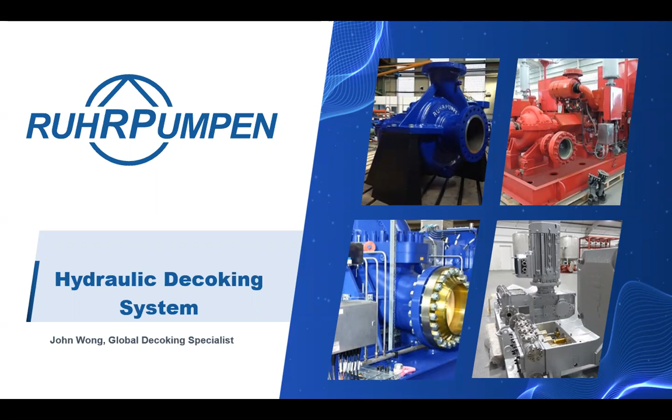My name is John Wong and I am the Global Decoking Specialist here at Ruhrpumpen. My role is to support OEM installations as well as revamp jobs around the world. Today, I'd like to give you a brief overview of our company and its products to help you succeed in your decoking operations. After a quick introduction about Ruhrpumpen, I'll touch on the various components of our decoking system, which sets us apart in the marketplace.

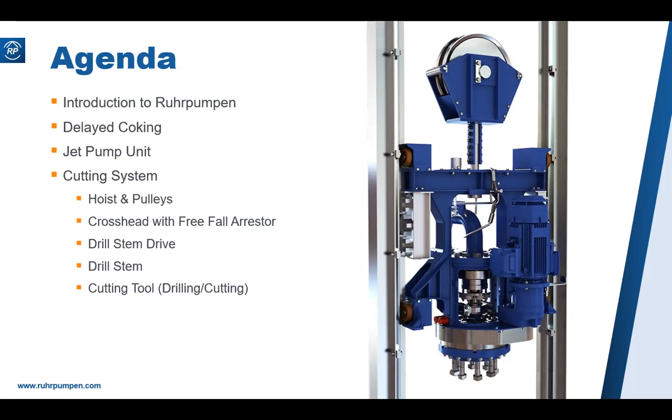Ruhrpumpen began in 1950 in Witten, Germany, with the sole purpose of maintaining existing pumps of all makes and models. There were a series of mergers and acquisitions in the mid-50s, 60s, and 70s, and eventually in 1996, the Thyssen board decided to go a different direction and sold off its pump business.

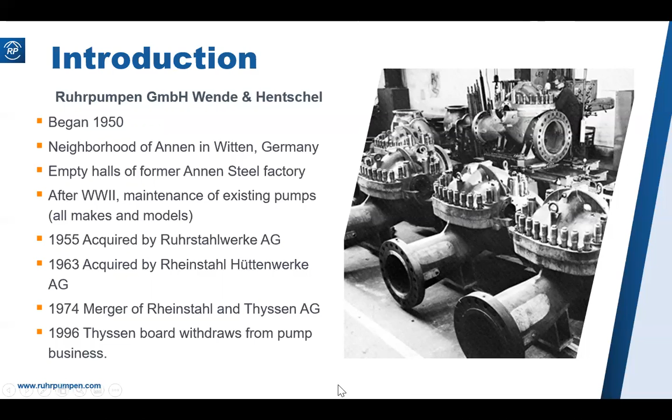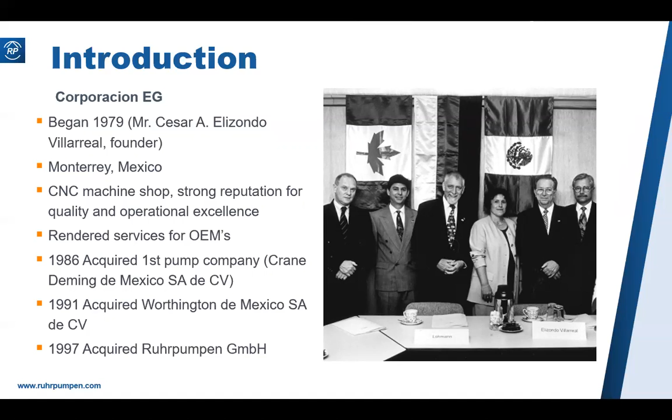In the meantime, Corporación EG was founded in Monterrey, Mexico in the late 70s as a CNC machine shop with a strong reputation for quality and operational excellence. It too acquired various companies, especially pump companies in the 80s and the 90s. Finally, in 1997, it acquired Ruhrpumpen since it was a perfect match with its business philosophy.

This chart is showing the trend over time of the size of the decoking drums. The top line, or the red line, shows that the flange to flange length of the drum steadily rises over time, while the blue line at the bottom is showing that the drum diameter is also increasing as well. So that means more volume of coke needs to be cut.

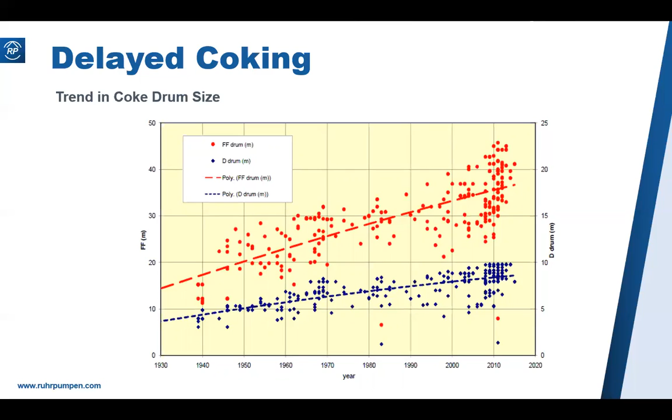Over the years, the coke is also heavier. Ruhrpumpen has always designed a 6,000 PSI system from the start so that it would cover the realm of all decoking parameters. So we've already designed for this trend.

The heart of the decoking system is the jet pump, which is also the largest pump in a refinery. It is a BB5 design according to API 610 with a cartridge designed for easy changeouts. And easy changeouts are important because that means the pump is usually unspared and continued operation is critical.

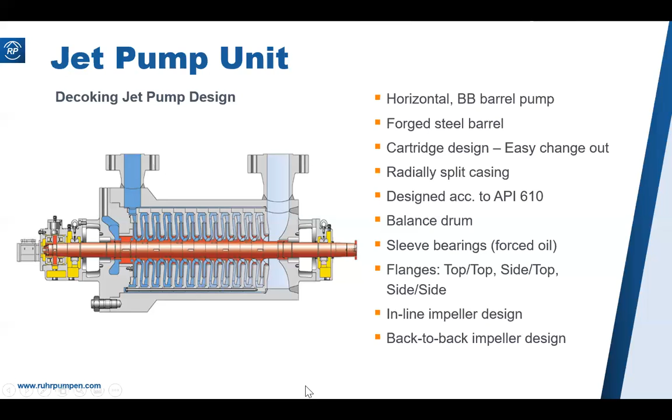Depending on the cutting conditions, Ruhrpumpen may recommend an inline impeller design or a back-to-back design. And the advantage of a back-to-back arrangement is lower axial thrust loads, resulting in a longer thrust-bearing life. Jet pumps are centerline mounted to better accommodate for thermal expansion in the process. And as you can see, the flow rates, heads, and speed can be quite high to meet decoking requirements.

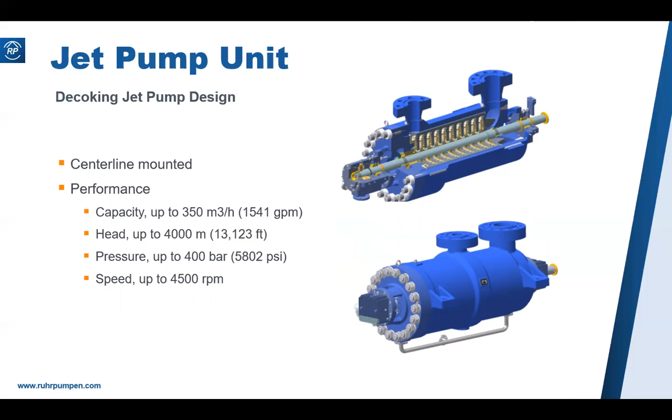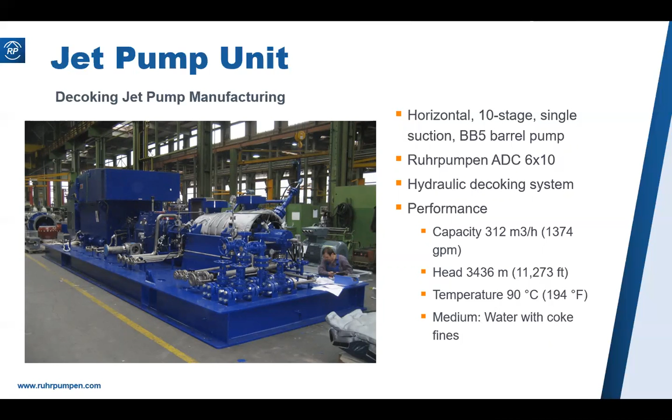Ruhrpumpen is set up to conduct functional testing on the complete unit. This may also include the jet decoking control valve as well as the jet cutting tool.

To properly conduct a complete unit test, it's important that the pump skid is on a massive permanent foundation rather than raised up on temporary supports.

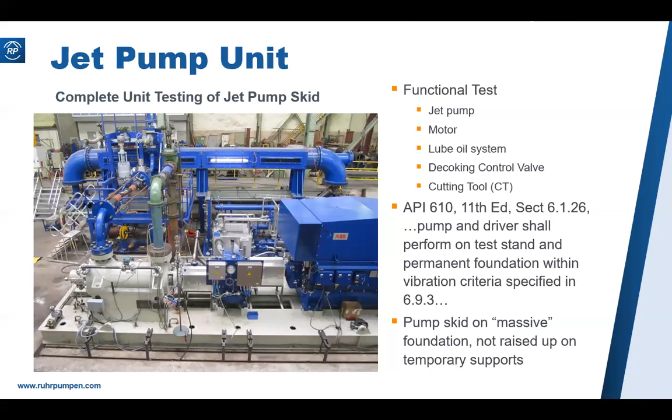One of the requirements for API 610 is that you have to measure the vibration during the testing. And the reason for raising the pump up is to allow for the oil to drain back to the lube system reservoir by gravity. So for vibration purposes, we really don't want to raise them up on temporary supports, but rather have the pump skid on a foundation.

Ruhrpumpen's test facilities allow for the lube oil skid to be installed in a sunken area of the test facility to allow for gravity flow of the oil back to its reservoir. That way, the pump skid can rest on its massive foundation and not be subject to vibrations induced by being placed on temporary stilt supports.

Through the port windows in the blue section that you can see, the long blue section, you can observe the water stream. And the length of this blue section simulates up to a 30-foot diameter drum. You're always welcome to visit RP's facilities to observe this type of testing.

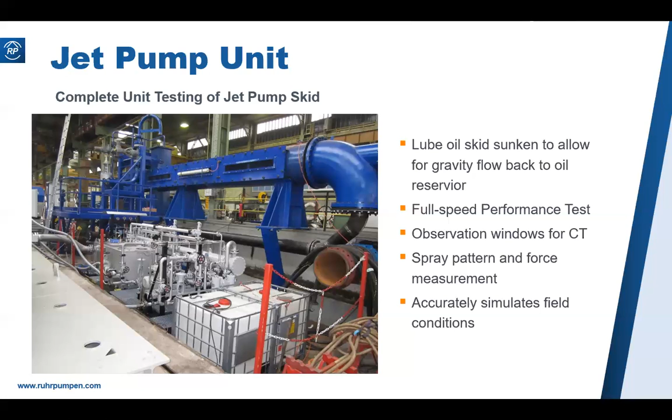Here you can see a jet pump skid installed in the field with the pump control panel.

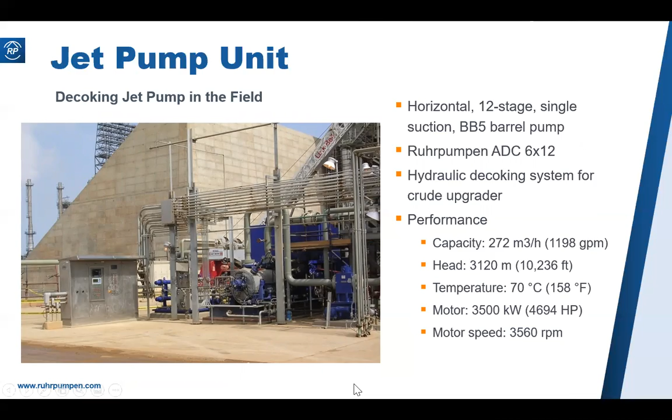And now I want to go into the cutting system. In this configuration of the cutting system, the wire rope starts at the hoist, goes through a single pulley to the crown block double pulley up here, and onto the traveling block double pulley located here, and terminates back at the crown block. Now the crown block has a load cell, which measures the wire rope tension.

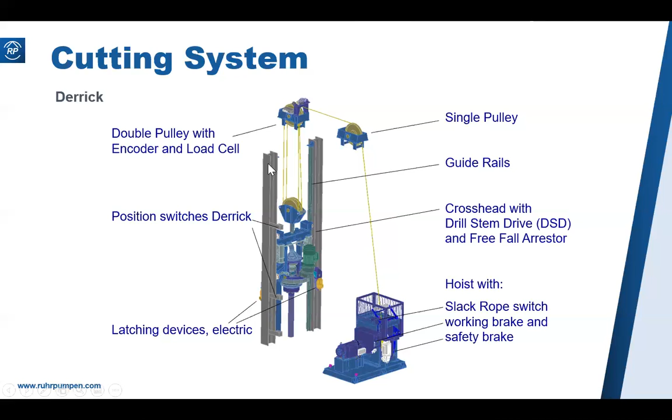An absolute encoder is also used to accurately measure the travel distance of the cutting system. Depending on the licensor, the wire rope can also terminate at the cutting deck location, as I show in the next slide. Here, this licensor typically prefers termination of the wire rope at the deck, and here is where the load cell would be located, near the hoist.

Like I said, some licensors prefer to have the wire rope terminate at the crown block.

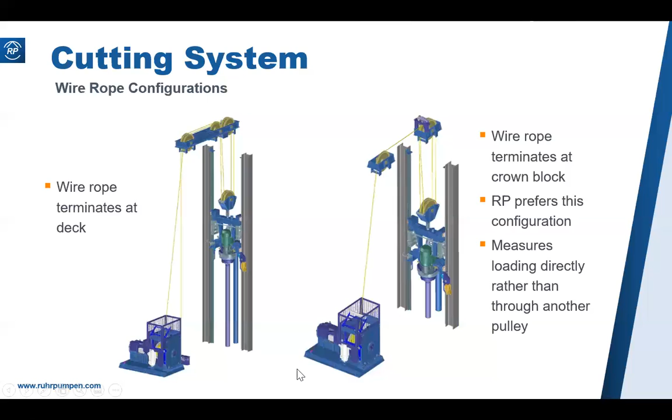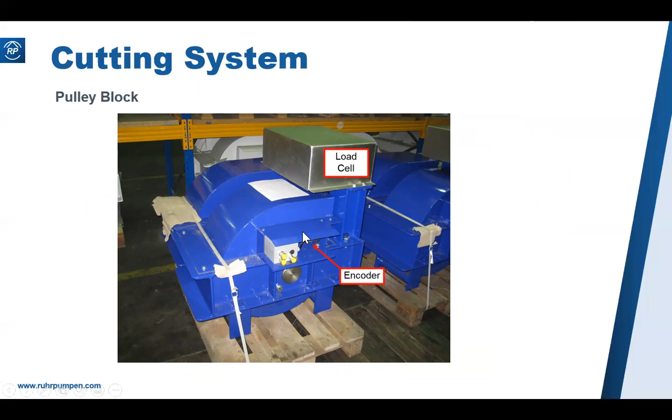This is a close-up view of the RP's crown block pulley with the load cell and the encoder. You can see that Ruhrpumpen utilizes the robust 24-inch diameter sheaves in its pulley blocks.

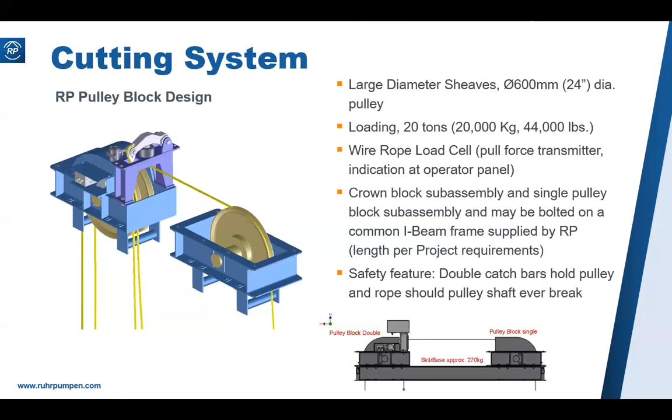One of the key safety features of the Ruhrpumpen pulley blocks is the double catch bars. They are indicated at the bottom of each blue colored pulley, right here and over here. The purpose of these are to catch and safely hold the pulley and rope in the unlikely event that the pulley shaft ever breaks.

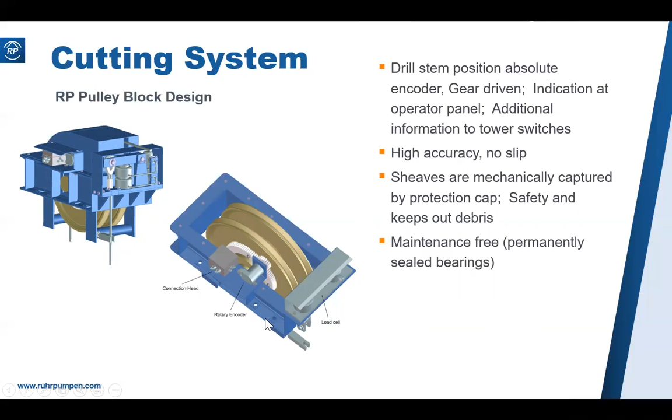Here's another close-up picture with the cover removed. You can see that the pulley is gear-driven and drives this absolute encoder here, and this allows for high accuracy measurement with no slip. We use permanently sealed bearings, which will enable a maintenance-free operation.

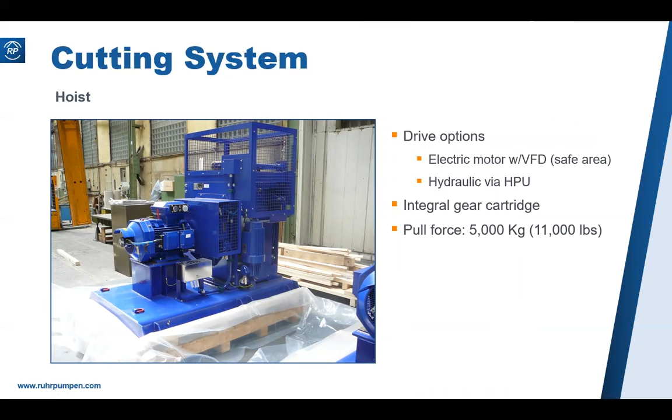Moving on to the hoist. The hoist has two different drive options, electric motor with VFD, as well as hydraulic driven. Inside, it's an integral gear cartridge, and the pull force is up to 11,000 pounds.

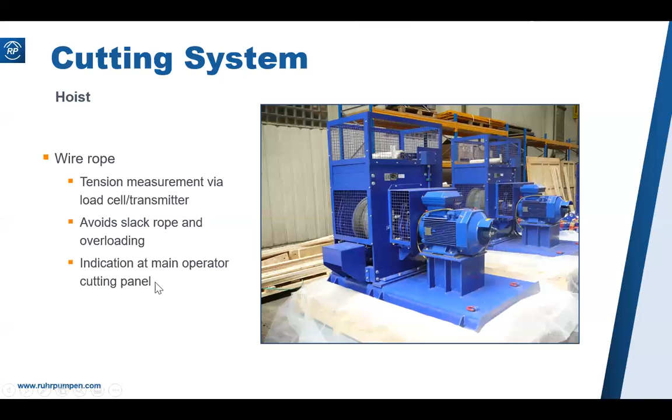Once again, the tension is measured via a load cell at the crown block, where slack rope and this tension are indicated at the main operator cutting panel.

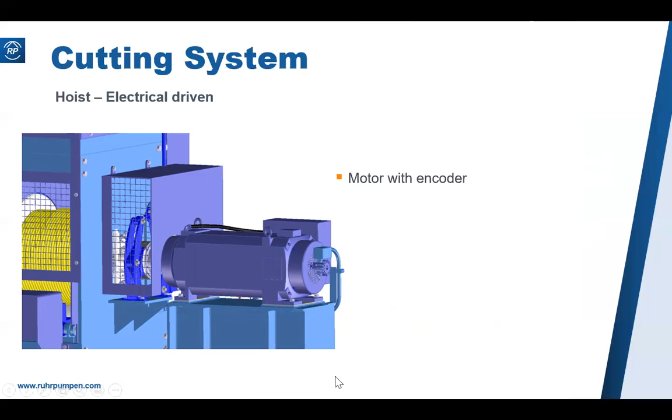Here's a close-up picture of the motor with encoder. Not only is there an encoder at the hoist motor, but there's also one at the crown block. When we remove the cover, you can see the working brake, which is actuated by an electric solenoid, as well as the backup safety drum brake. So in all, there are 3 brakes, a redundant system: the working brake, the safety drum brake, as well as the electric motor brake.

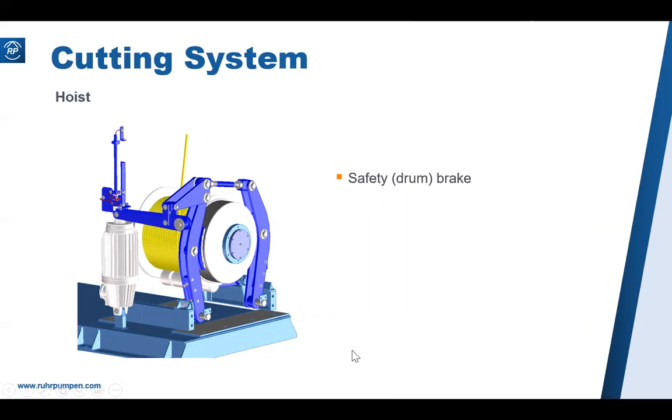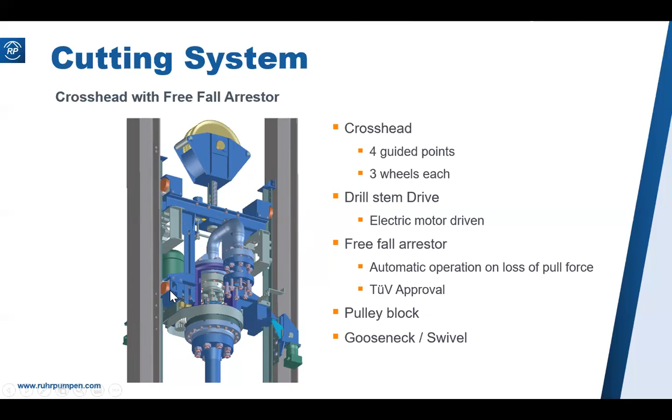The drill stem drive is electric motor driven, and the freefall arrestor is built into the guided points here. You can see up close what the roller guides look like. It's a 3-wheel system for very smooth operation.

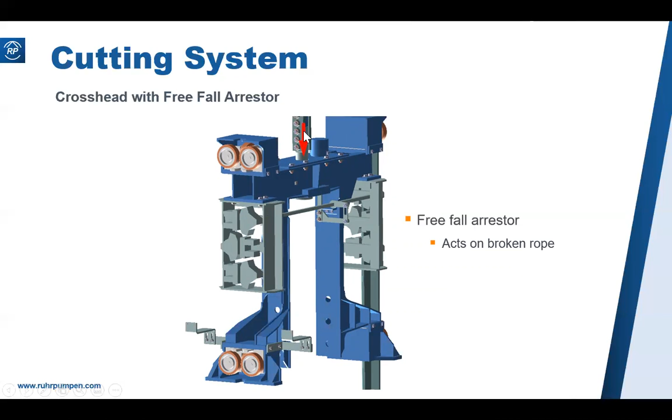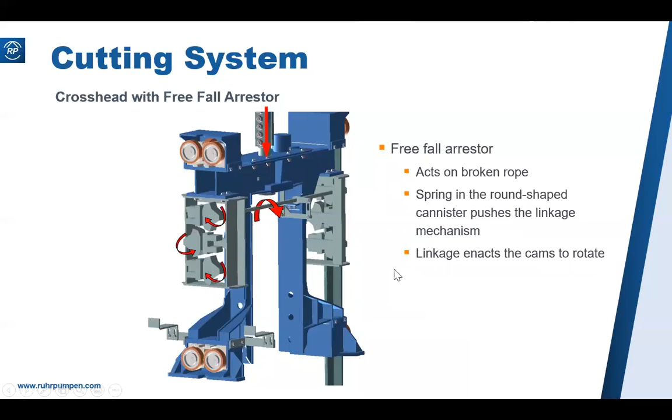Now, the freefall arrestor system works in such a manner: it acts on a broken rope. So if you lose the holding force of the wire, it breaks, for example. You then have a spring, located in this round-shaped canister, pushing the linkage mechanism, and this linkage enacts the cams to rotate. When the cams rotate, it presses onto the T-rail. So the faster the fall, the greater the grip will be on the T-rail.

Tungsten carbide bits, located in the bottom of each cam I've shown here, are able to grab securely onto the rail.

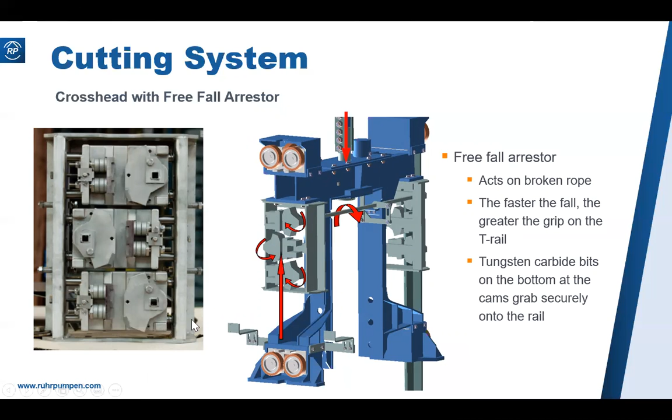We can do field testing during commissioning, as well as recertifying the freefall system every turnaround or every several years, whatever the customer prefers. It has a weight capacity of 9,500 kilograms, which is 20,000 pounds. And as I mentioned, there is functional testing available at your sites.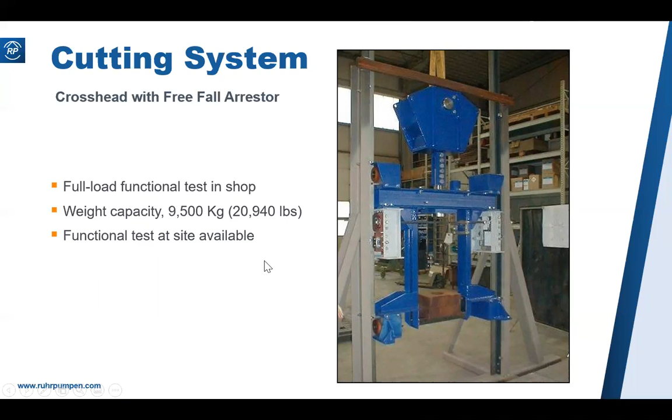The drill stem drive has primarily a VFD-driven electric motor. It has a high capacity load bearing, as indicated here, the slewing ring type. It's grease lubrication with auto greasers, which means very, very low maintenance, and there is no oil in the system, so there's no oil bath change. We also have cartridge packing for the seals.

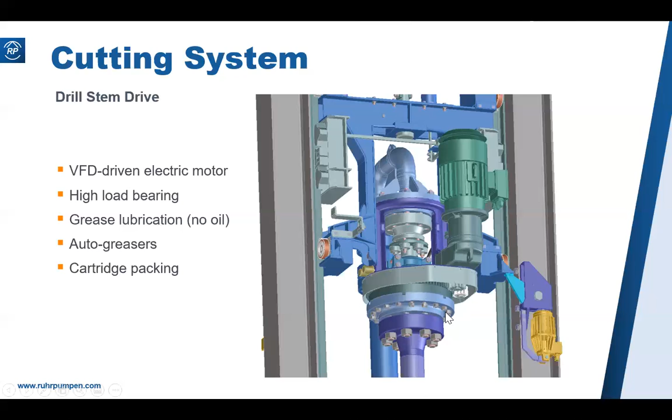Taking a look at the exploded view here, we could see the center bull gear design, and it's very similar to what is used on a crane. In fact, that is where the idea came from. Ruhrpumpen has revolutionized their decoke cutting equipment with innovation and safety by bringing in proven technologies from other industries and adapting them to the coke cutting equipment.

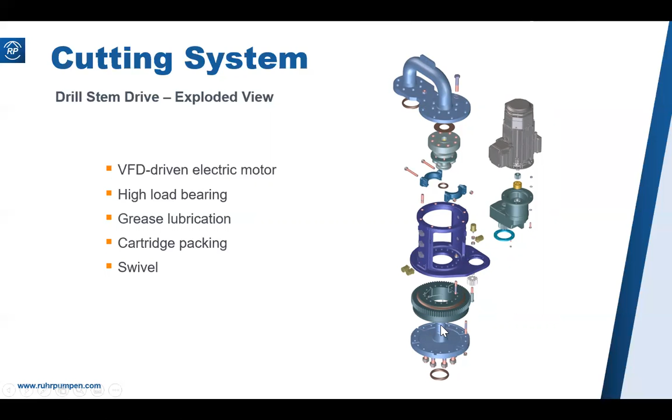Here's a simple cross-sectional view. You could see that the drill stem here is attached to the lower cover, which is attached to the bull gear, which rotates from the gearbox. And again, it could be a pneumatic or an electric motor here.

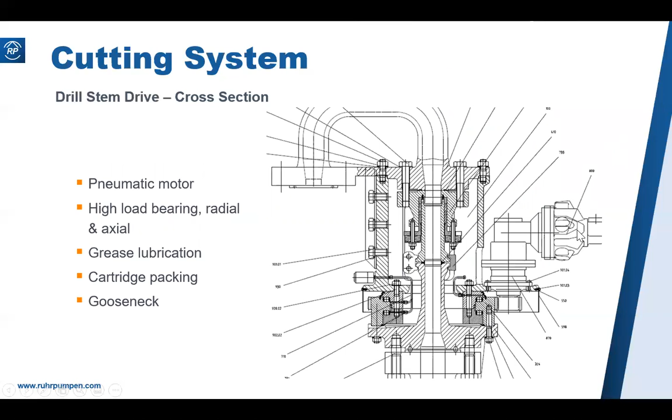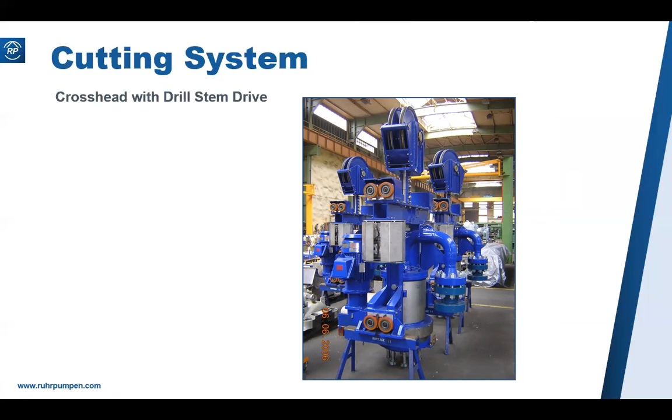Here's a picture of 2 units. This is the crosshead with the drill stem drive installed in it, kind of gives you an idea of what it looks like overall.

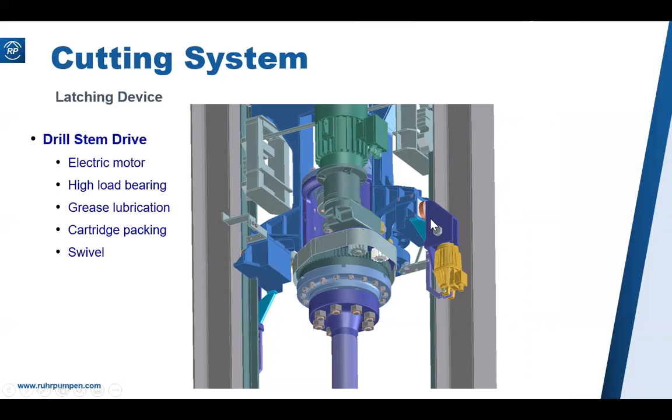Here you see the crosshead with drill stem drive on the T-rails, and you have these latches which will hold the crosshead mechanism in the park position.

I'd like to touch on the drill stem just a little bit. Drill stems were first designed as welded sections. Then in the 80s, it became threaded drill stem. And because of the high demands of the coker unit, and in particular the decoking equipment, there have been many attempts to solve the weak link in the decoking drill stem, which is the threaded connection.

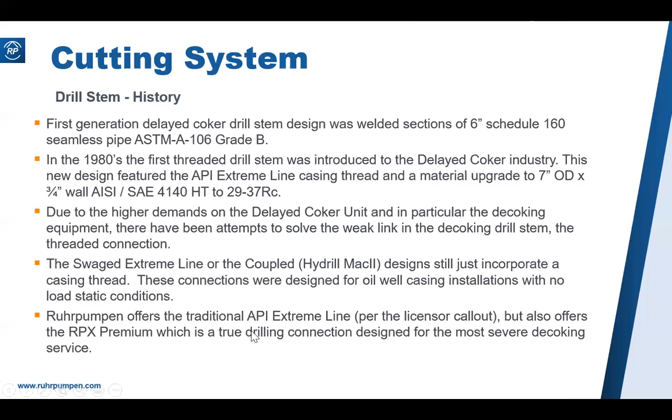So currently the licensors have approved the Extreme line as well as the Hydril Mach 2 design. But Ruhrpumpen also offers not only the traditional API Extreme line, but also offers an RPX Premium as an option. This is designed for true drilling in the most severe decoking service.

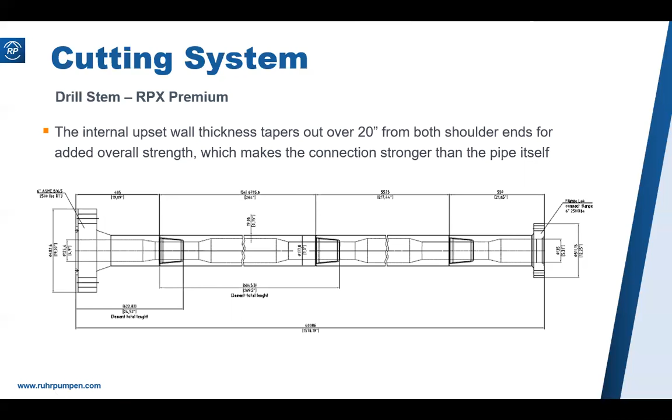You can see that the internal upset wall thickness expands 20 inches from both shoulder ends. So from this end, 20 inches in, and from this end, 20 inches in, is where the taper occurs. And this provides for added overall strength and also makes the connection stronger than the pipe itself.

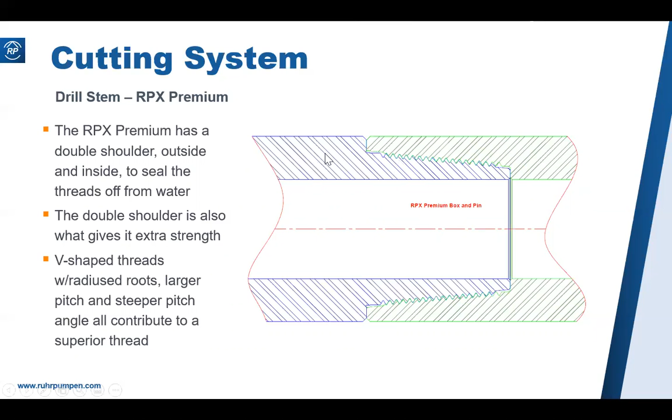Here's a cross section of the RPX Premium, double shoulder inside and out. This is where the shoulders are connecting, and it seals off the thread from the decoking water. We also have a very different thread profile, which is V-shaped with radiused roots and larger pitch and a steeper pitch angle. That all contributes to a superior thread.

I'd like to change directions and go to the cutting tool. Ruhrpumpen has the slimmest cutting tool on the market at 13.75 inches. You can also see that the cartridge here, the auto switch cartridge, is above the cut nozzles and 90 degrees to the cut nozzles. Because of this, it's a bolt-in design which is replaceable on the deck, so the tool never has to leave the unit or be removed from the drill stem just to change out the autoswitch cartridge.

Also on the bottom here, we have a long, thin, heavy-duty lower cover with protection plate, and this protects against plugged drilled nozzles when checking the outage or with a stuck tool. I want to also emphasize that the RP cutting tool has no oil bath as it's completely driven by water, so there's no maintenance having to change the oil regularly, and of course, no contamination of the oil.

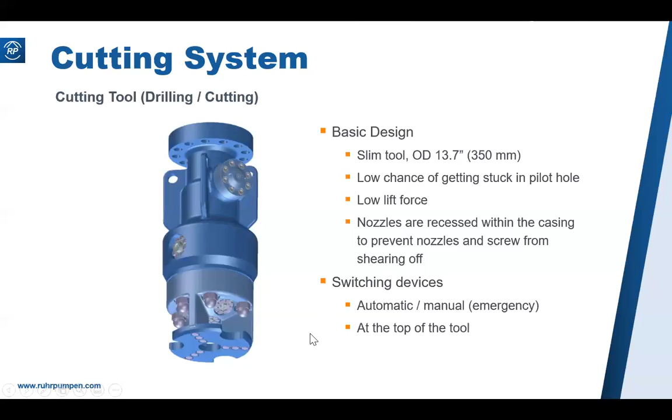You could see in this video, I'll start it. You can see that the pin extends when water pressure is applied and retracts when water pressure is removed. I'll play it again. You can see it extends and switches, it retracts, and then it pushes it in the other direction. This is what determines cutting mode as well as drilling mode.

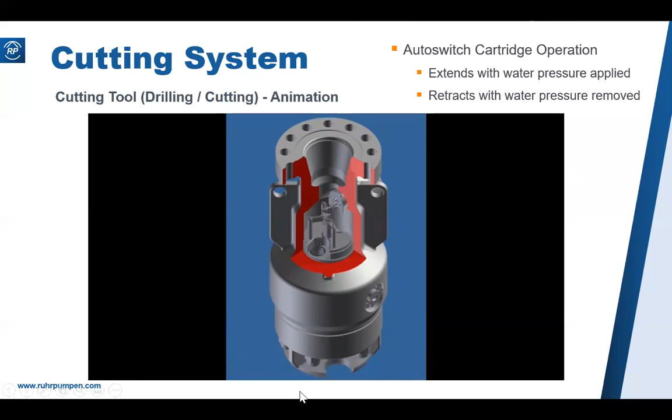The ball-shaped valves internally are double-coated and no seals are required. We have the drilling nozzles on the bottom and the cutting nozzles on the sides. For the drilling, if you look at the bottom left-hand picture shown here, we have a dead center main drill nozzle with 40% of the flow coming out, and 3 auxiliary nozzles at 0 or 10 degrees outwards with 20% of the flow in each, accounting for the remaining 60% of the water. So 40% in the middle, 60% on the auxiliary nozzles.

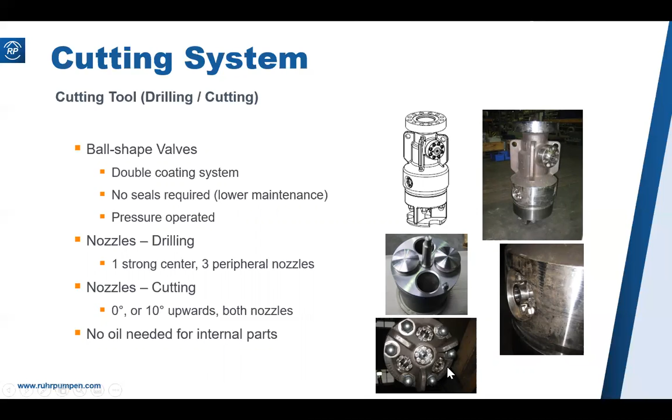This creates a water pattern similar to a drill bit, which allows us to cut a straighter pilot hole faster, and that results in less coke fines. We've optimized the flow diverters and nozzles to ensure laminar flow as much as possible, and that reduces overall cutting times.

Here I want to show you how we can manually switch the cutting tool. You remove the cutting cartridge plug, you install an overriding pin, you use a lever, which is provided as standard equipment, and push downward to pull the pin. The biggest advantage is the operator is not exposed to the outpouring of hot water.

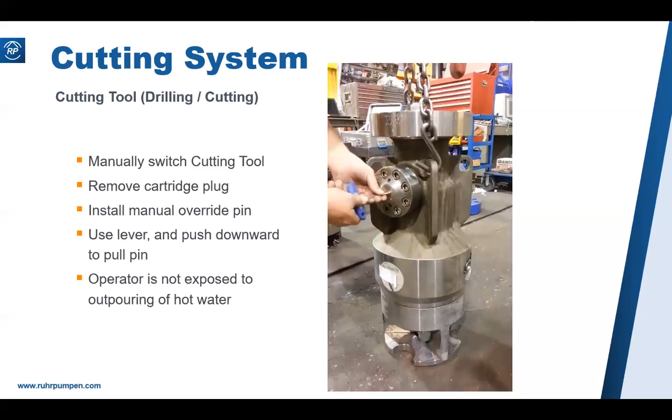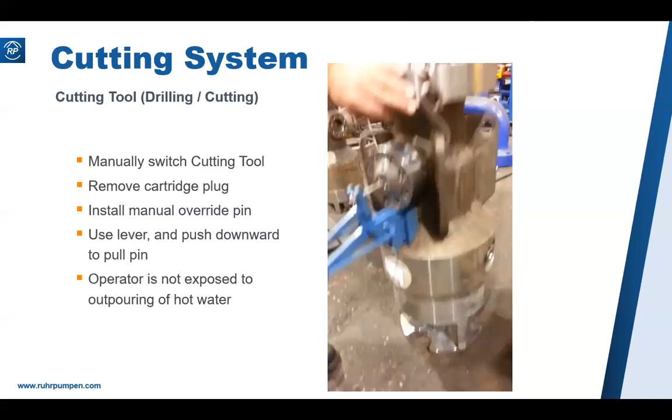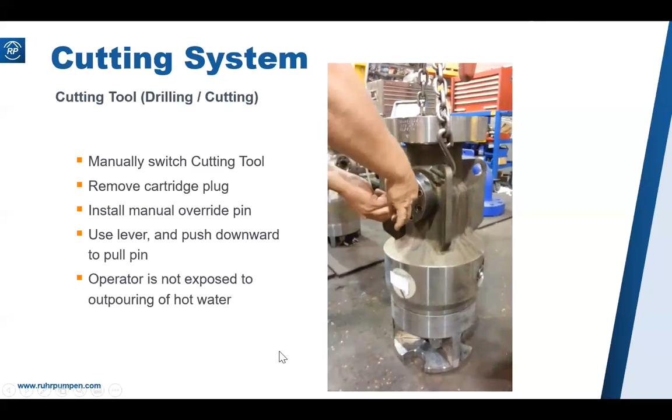I'll play this as a video to show you how easy it's done. Here we're removing the cartridge plug, installing the manual override pin. We're using the lever to pull on the pin, and there you go - that is auto switched. He is continually pulling it to show the different switching modes. And of course, you reverse the operation: you pull the override pin out, and then you replace the cartridge plug.

Each new automatic cutting tool leaving the factory has been functionally tested. Other NDE can be performed on request. But I want to assure you that any repairs or upgrades also get tested in our test labs, and there's a test lab in Houston as well as in Germany.

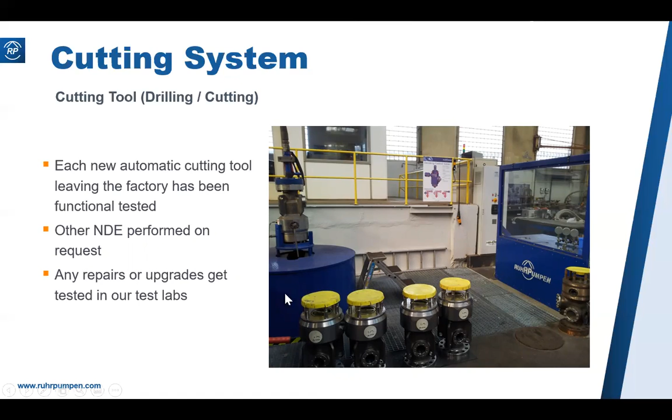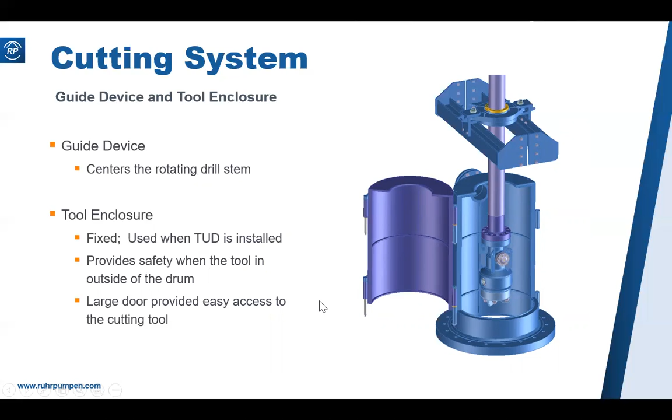We can offer tool enclosures. The guide device seen above here is bolted onto our rails, which provides a much more robust system compared to what's in the marketplace. The tool enclosures are used, and this is fixed on the top unheading device, of course, when a top unheading device is installed. It provides safety when the tool is outside of the drum, and it comes with a large door, which provides easy access to the cutting tool.

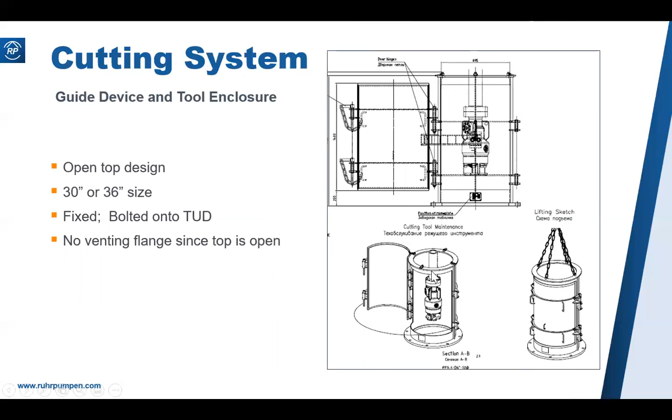So here you could see that there's no venting flange since the top is open. But if you do need a venting flange for vapor recovery, we could also close the top on this as well.

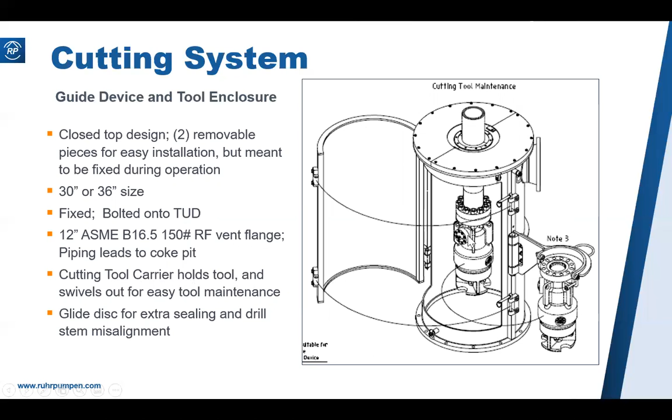One of the features is that our tool enclosure has a cutting tool carrier, which holds the tool and swivels out for easy tool maintenance. Because it's a tad heavy for an operator to hold, and it certainly isn't safe, this feature is really useful. You can see another picture of this here.

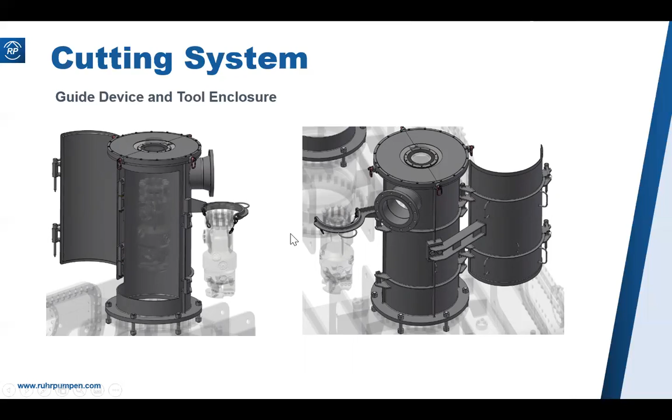The top of the tool enclosure has a glide disc, which accounts for any misalignment.